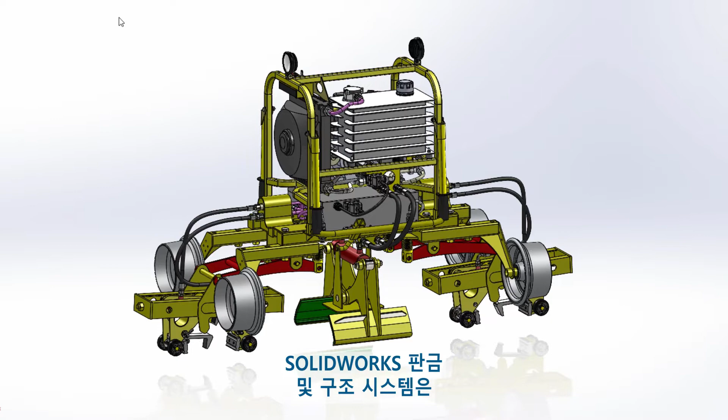SOLIDWORKS sheet metal and structure systems have new enhancements in 2023 that enable smoother design-to-manufacturing workflows and speed up tedious tasks. This track-setting machine has a hydraulic guard that needs to be extended to further protect these couplings from heavy equipment and falling debris during operation.

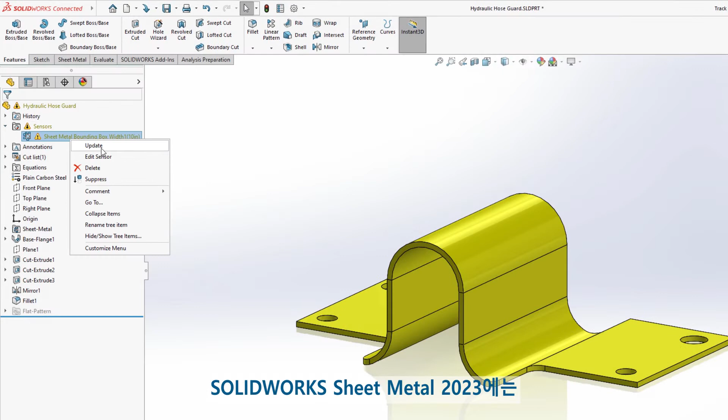Opening the sheet metal part, we can easily extend the front of the part 2 inches to cover the coupling. But notice when making this change, a warning popped up in the tree. New for SOLIDWORKS Sheet Metal 2023, sheet metal specific sensors can be created to dynamically warn you if the flat pattern of the sheet metal part exceeds width, length, area, or bounding box area blank values.

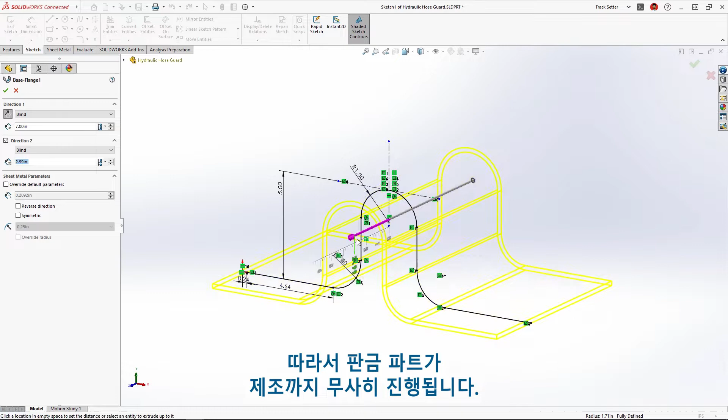This new feature saves redesign time and catches costly mistakes, so your sheet metal parts will sail through manufacturing. By reducing the outer dimension of this part, the warning goes away. When this part was originally created, a sketch was used to create the initial base flange where all bends were dimensioned equal.

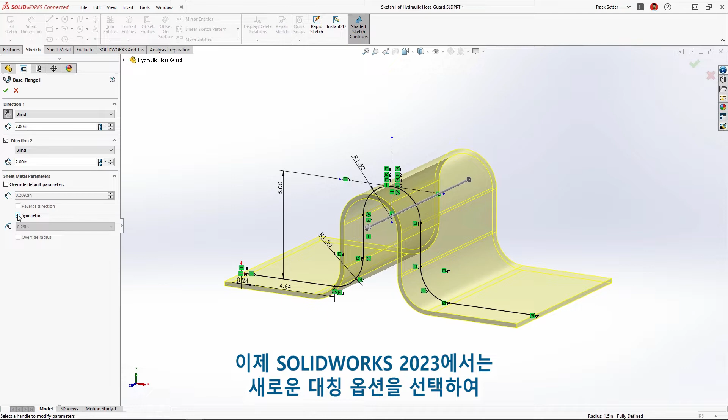But when accounting for material thickness, it results in different radii for the inside and outside corners, and that's a problem for manufacturing since this requires additional machine setup. Now, in SOLIDWORKS 2023, we can choose the new symmetrical option, which will ensure an identical inside and outside resultant bend radius.

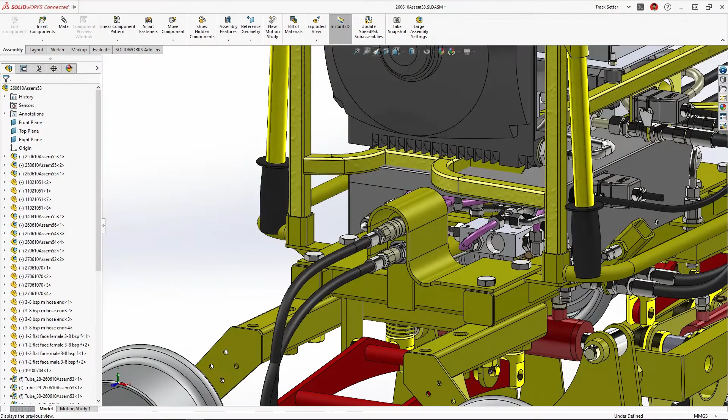We used a gauge table for this sheet metal part, and now in the drawing, the gauge value can be added directly to the cut list properties, preventing the need to create any global variables or equations. As we're preparing to ship the machine, we'll need to build a sturdy, reusable shipping crate to prevent damage while transporting from job site to job site.

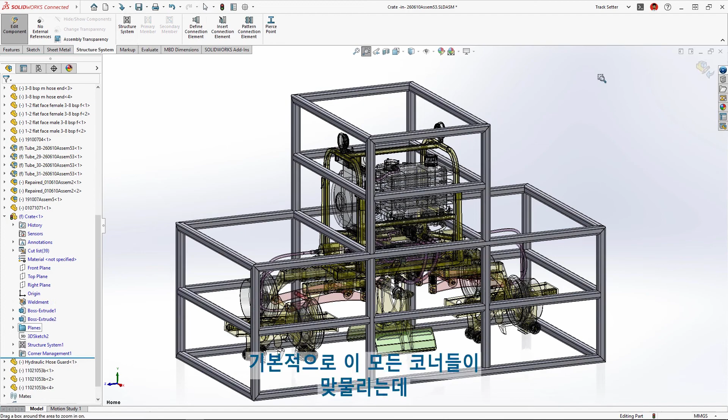SOLIDWORKS Structure Systems was used to build this steel crate from a combination of 3D sketches for primary members and reference planes for secondary members. By default, all of these corners are mitered, which is great for some applications. But for this crate, we'll need to change the corner treatments to make it easier to build.

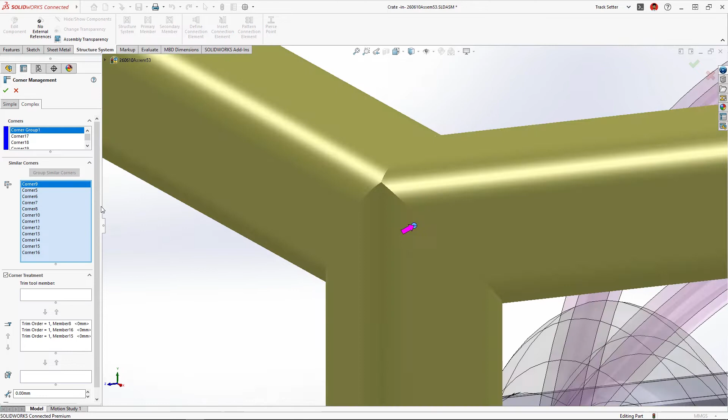New in SOLIDWORKS 2023 Structure Systems, we can now automatically group similar corners to apply the same corner treatment. These purple arrows identify which corners will belong to the group. Using the new Zoom to Selection command, we can verify that the trim order is exactly what we want.

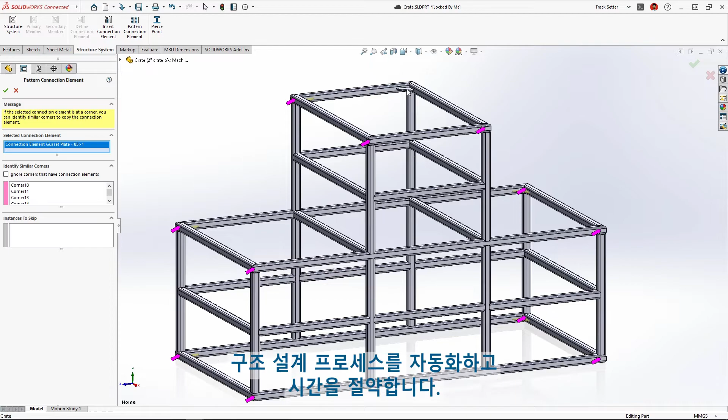To strengthen the corners, we'll add a connection element like this gusset. New in 2023, these can be patterned to similar corners. Again, the purple arrows identify where the patterned gussets will go, automating the structural design process and saving time.

We may want to build a more durable crate with larger square tube stock. New in Structure Systems 2023, we can now change the weldment profile for a select set of members and save that to a unique configuration.

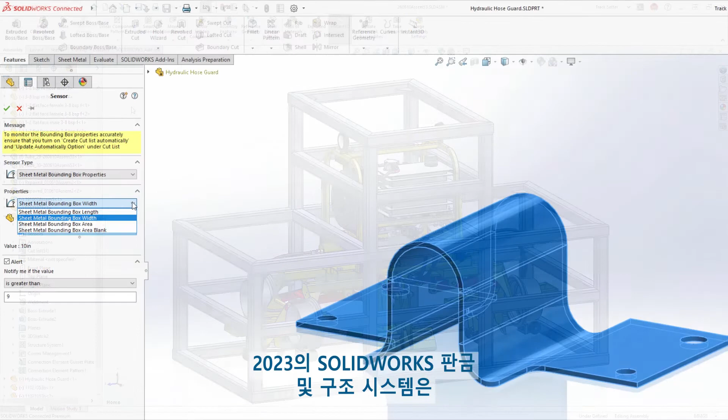SOLIDWORKS Sheet Metal and Structure Systems in 2023 accelerates your design to manufacturing workflow and adds new features that every shop floor operator will enjoy. And when you connect your designs to the 3DEXPERIENCE platform, sharing your work with other users or across teams is easier than ever.